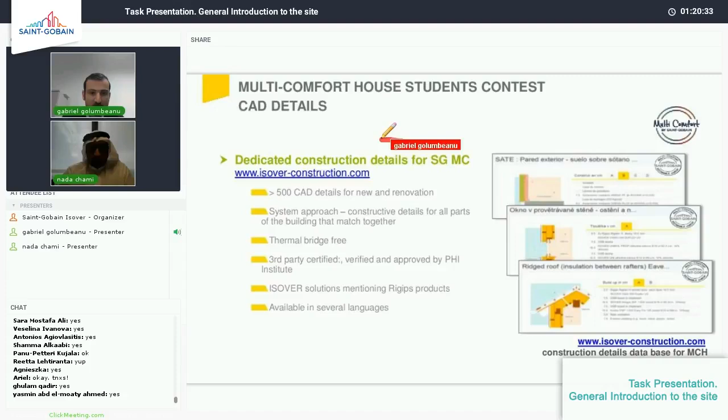And we are going to have also a specific training for the multi-comfort house designer next week. It will take about 1 hour, 1 hour and a half, just to walk you through this information and support you while doing this.

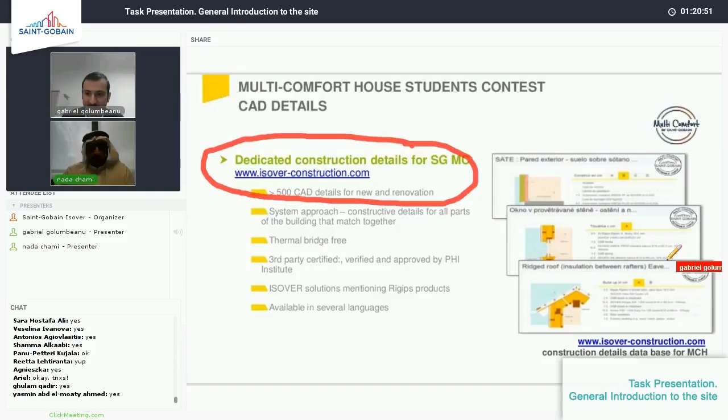So just speaking about the designer, this will give you an idea if you are heading in the main direction. It is not that somebody will look if your result will be, I don't know, 69.9 kilowatt hour per square meter per year for cooling or 71.2. It's just to give you the perspective and an idea, and to help you while you are designing to understand better where the influences are coming from.

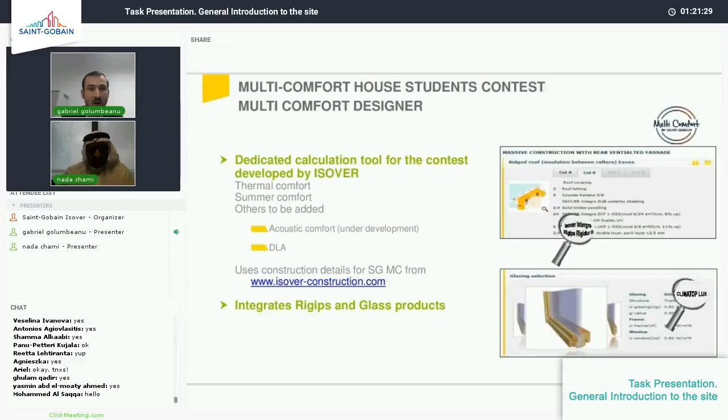Then, there are also trainings for students beside the ones which are done locally. There is this full set of online trainings in which we try to put together all the people that could support you and give you information about the different dimensions of comfort, about the contest task, and about all the other issues that can be linked or related with this.

You have received the training. The connection is very simple: you just type in the address of the website, and once you have it, the connection will be open around 1 hour before we start, so you can very easily log in.

Any specific questions linked to this part? You can still hear me, yes? Yes. So, good. Do you have any questions linked to this? Good.

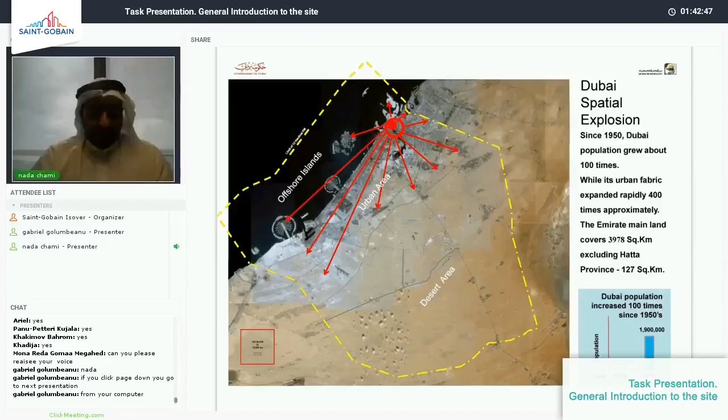and Dubai Airport and many other projects, which are known to be the milestones for the city before it boomed during the era of Sheikh Mohammed. And during that time also, Sheikh Rashid set up all the governmental institutions, including Dubai municipality and other institutions.

Now, from the slide here, you can see the old Dubai, which we saw in the first slide, and its relation to the site. So the creek was extended all the way to where you see your site is, and then at this point here, it stopped, where we have the reservation at the moment.

And then only a few years ago, it was further extended here throughout the Business Bay and Jumeirah. And it was, I mean, when I look at it, it is more like an extension of what happened in the past, an extension of the economy of Dubai through its peak.

There are a few pieces of information that we can mention later. Can we go to the next slide, please? Okay.

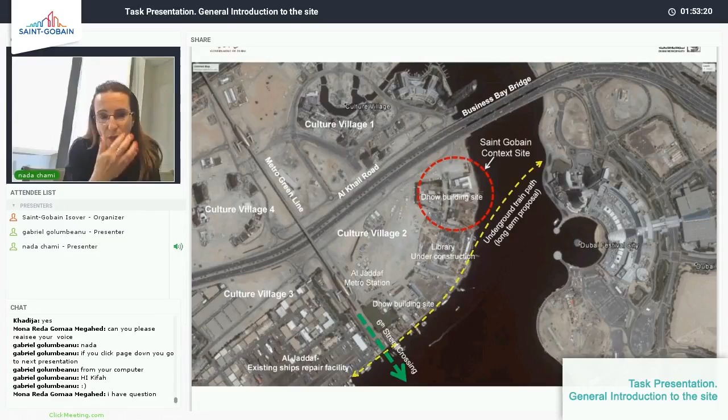The other component we are considering in developing Culture Village 2 is transportation. As Gabriel said in the brief, students need to look into energy saving, so you need to work carefully on the selection of construction materials that you include in your design.

On the other side, looking to the bigger scale of the master plan, we are trying to create on this spine, which has an existing metro station, a transportation hub in which we will have taxis, buses, metros, and there is currently a marine station in which people can use the ferries or small abras to get transportation to this site, the old Dubai, or the new site of Dubai, which takes you to Business Bay.

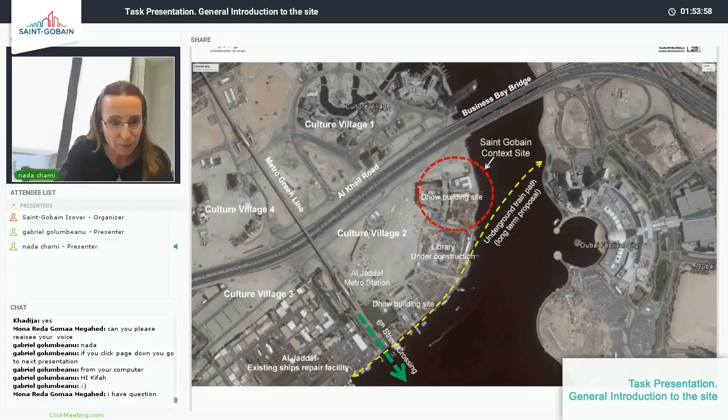Mona has a question. Mona, what is your question? Yeah, go ahead, go ahead. She will ask.

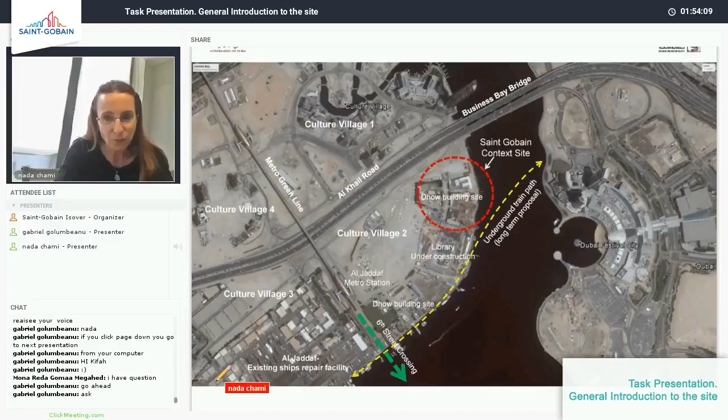I think it's the skin. Okay, yeah, that shows the limitations. That's the boundary.

Are you planning to extend the corniche to the location of the site? Okay, Fatima. So as I mentioned, there will be onshore components and there will be offshore components.

The offshore components, we are planning to extend on the creek front of the development. We are trying to extend this area to do marinas and some floating retails. I lived in Sydney for a while, so I know very well how in Sydney they extend the pontoons to have some retail, some jetties that people can walk inside the water. So as I mentioned, yes, we are planning to extend the corniche inside the water, of course, if we get approvals from the authorities.

But as I said, yes, we want people to interact with the creek. We're not going to block it. And we're working to have Culture Village as a tourist destination as well. I hope I have answered your question, Fatima.

Just to continue on the presentation, as you can see, this is your site of the competition. The area is around 500,000 square meters, if I'm not mistaken.

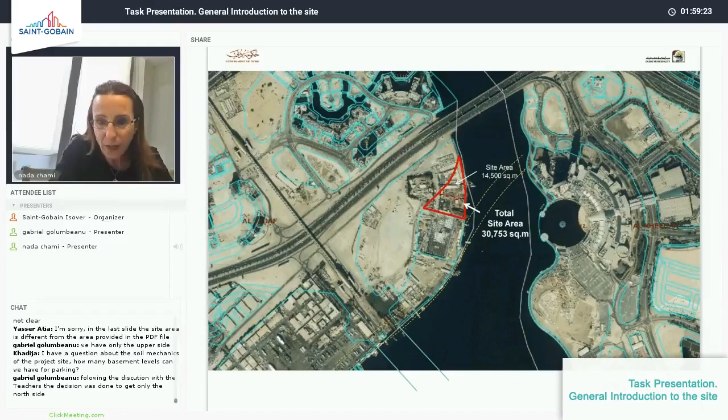So if I go back, this is the existing, as I mentioned, this is the Abra station. These are photos showing how the area will look like, this one from the festival site. This photo is taken from this side, showing the bridge.

So your site will be here. If you can see, these are the dhow boats I told you about, which local people are constructing. Thank you, Gabriel, for the help.

We'll go through, so yeah, this is the site, as you can see. This is Burj Khalifa. I'm sure maybe the photo was taken on a foggy day, but it's visible, especially on clear skies in summer.

And this is the current dhows, and this is the library, which is under construction. You can see the cranes, you can see the building is coming up.

Mona asked about the road: will the Corniche take a part from the site, or will it be from the extended part? We will share with you the site plans, but the Corniche, which we call the promenade or the quay wall, is usually part of the site, the solid land. If we want to extend into the creek, it's going to be a floating structure. So the Corniche or the promenade, yes, it's part of the site.

And of course, we are coordinating with Dubai Municipality Construction team to make sure the library as well, the area surrounding it, is compatible with our design. There will be accessibility from the library to the promenade. I hope I answered your question.

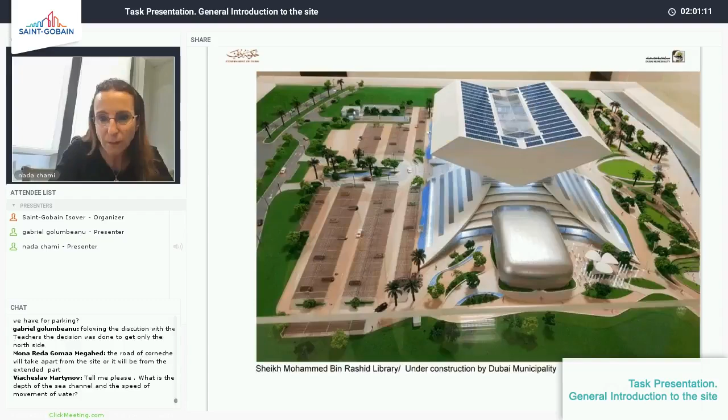This is another view from Festival City. So this is the site, this is the library under construction, this is the metro station, as you can see, and Burj Khalifa.

There will be ferries or abras connecting both sides, so from here to here, there will be abra stations. And as you can see, on the Festival City opposite side, they have the big mall and the hotel as well, so it's another tourist destination that can bring people to your site.

How about setbacks from road, library, and sea line? The codes for this site are not available yet. Dubai Municipality team will provide you with those details. You can also check them on the website of Dubai Municipality.

I will pass again to my colleague Saif, so he can take you through His Highness Sheikh Mohammed Library. So the library is currently under construction. We just have this image at the moment to see the form that will be shaped soon, which will be part of the rest of the development.

But to take you through, we have some other sites that also show some important details that concern you. You can find from the web all the information about the climate. As you know, most of the year it's very hot, but in winter we have very beautiful weather where people spend so much time outdoors.

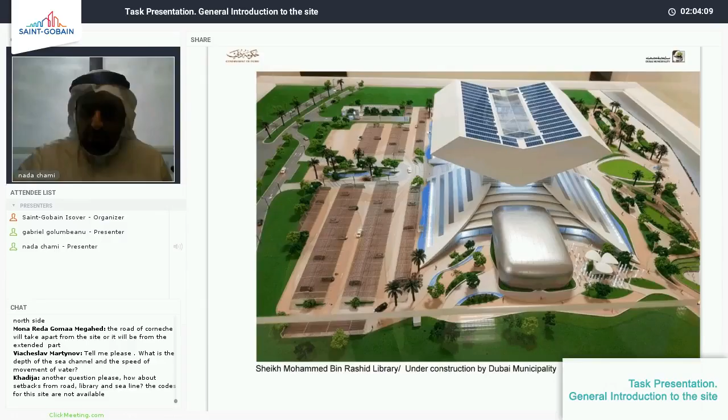You can see the proximity from Dubai Airport. You can see other important sites like the DIFC, the Dubai International Financial Center, and the sanctuary, which is a very important issue in Dubai, not only Dubai, but globally. Environmental issues have to be considered in all design, with the sustainability and all the regulations and rules that were set for you on the website.

I only knew yesterday that we have flamingos migrating to Dubai in this region, so this is also a sanctuary considered an attraction for these birds. I learned that after some research and monitoring their movement, some of them are staying the whole year in Dubai, so they don't travel anymore. They like staying in Dubai, so this is a matter you can also consider.

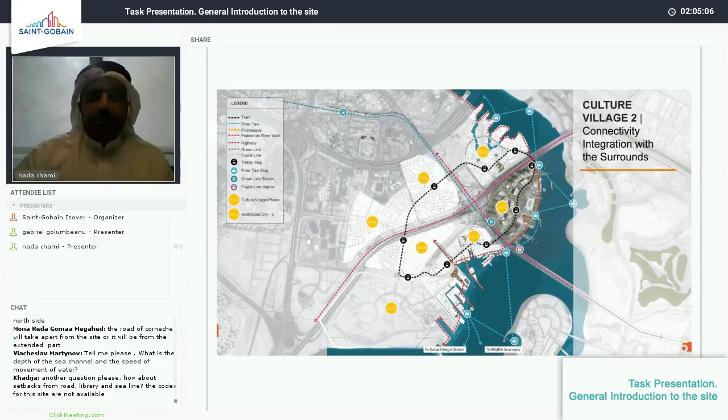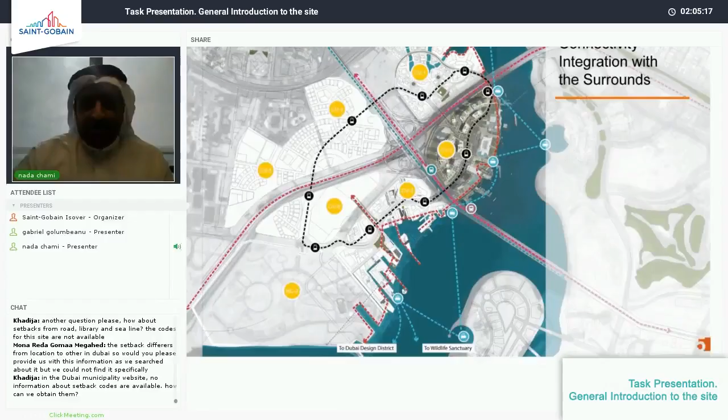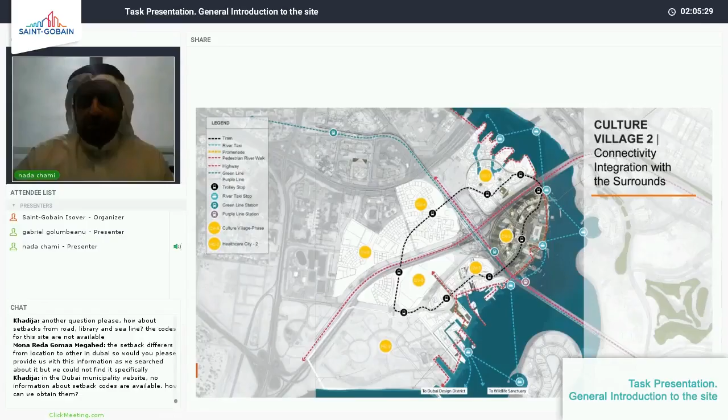This plan shows the road network. It shows also the metro lines that will run beneath the creek, and it shows the tram, shown in black, that runs through the site. So your site, and also the ferries.

Your site is going to be in that corner there. The blue line shows the connection with the ferries, as my colleague Ms. Kifah explained. It will connect to the other side, enhancing the activities happening between both sides.

For the setback codes, we will be sending them. Khadija was asking about this. You can check the Dubai Municipality website, and all the information is available there. But we will also, through Saint-Gobain and the organizer's website, try to provide something very soon.

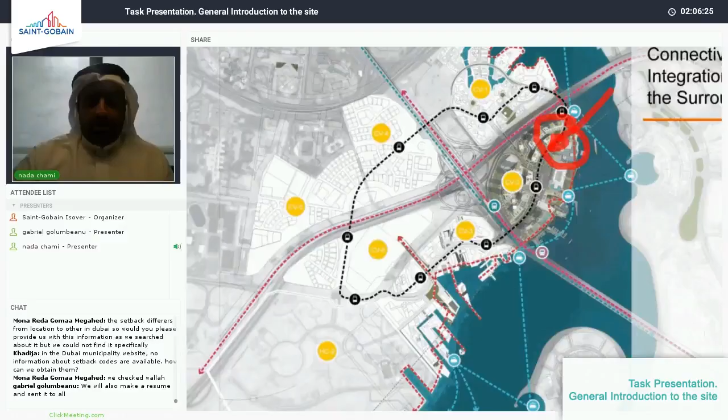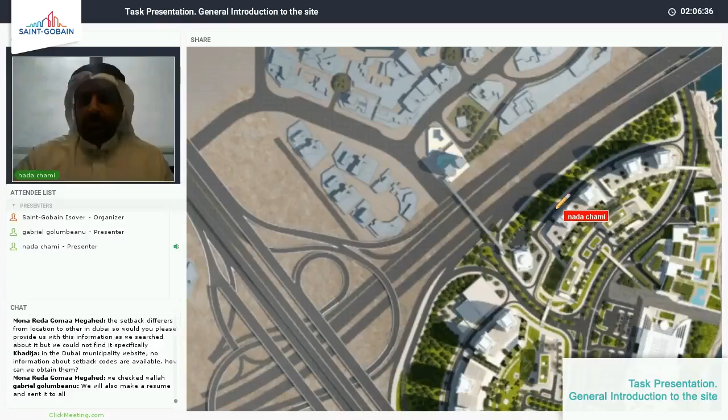This next slide shows the development by Dubai Properties, and your site is going to be in this somehow triangular shape. It's a triangular shaped site.

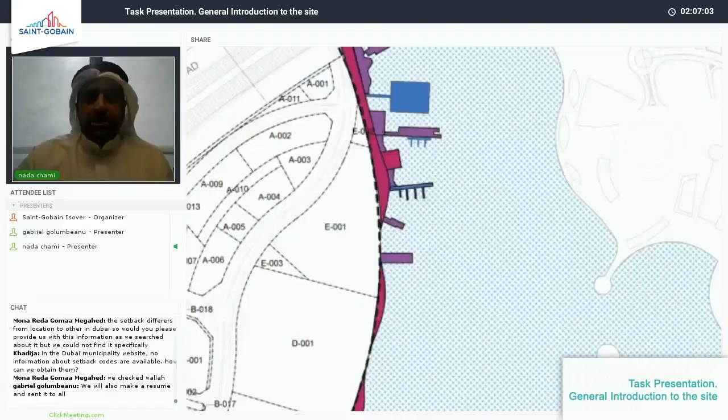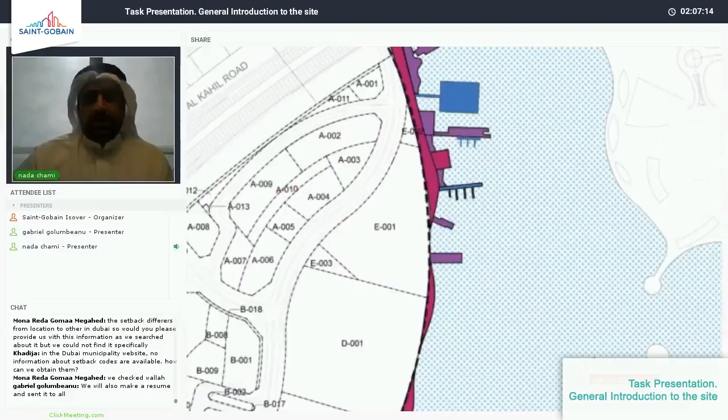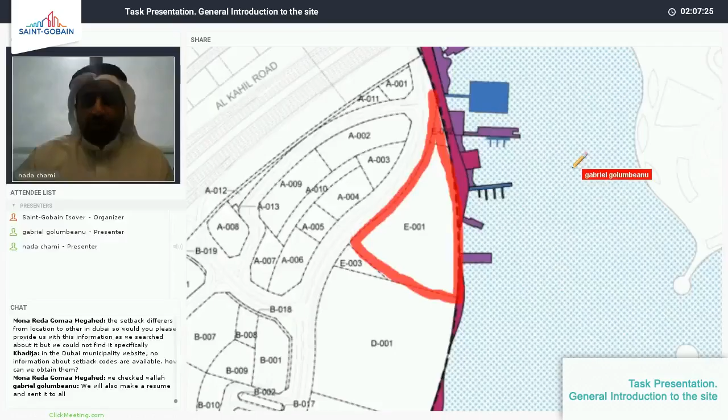So you have a major part of the site on the creek, so there's so much interesting things to do: to have accessibility for the public, to have great views, to have places where people can have quiet and more tranquil spaces in relation to the busy city.

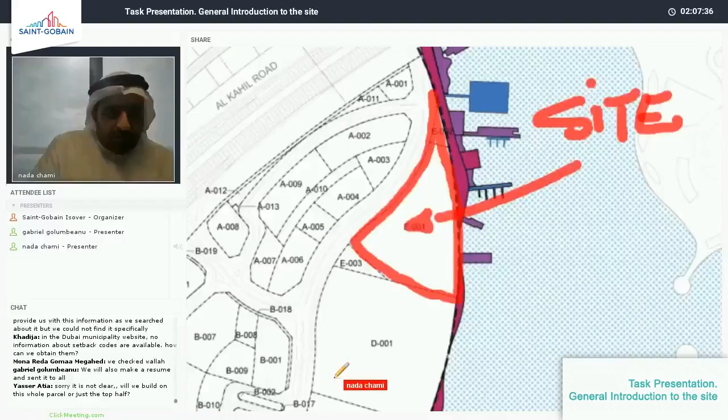Sorry, I'll answer what her name was. She asked about the Corniche. Mona? Yes. How can we go back? Okay, you have the question? Yeah, I remember what she said. Sorry, I'll just explain what Mona was asking about, when some of the students asked about the residential and the Corniche. Sorry, I'm just trying to zoom out. Just make it smaller. Okay, no problem.

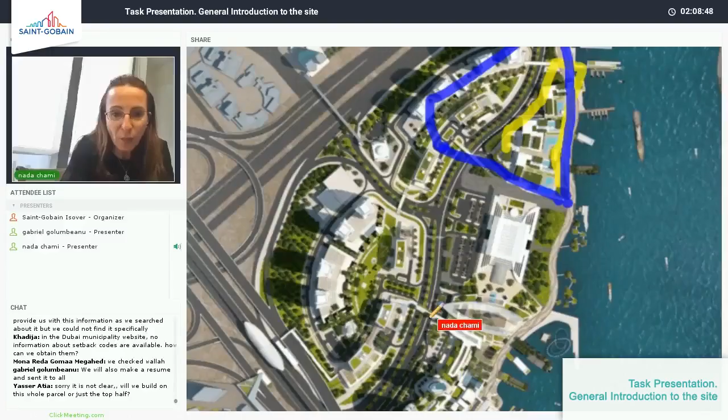As you can see, this is the boundary, the plot boundary, so this will be the Corniche all around. Within the plot boundary, we're going to build the Corniche exactly up to the plot limit. These are the residential towers on top, with their own access road from the back, so privacy is maintained for the residential area. This area will be more of a tourist destination, with hotel, retail, and the library, more publicly open, with their own parking and car access. This area, of course, no vehicles are allowed—it's going to be mainly for pedestrians.

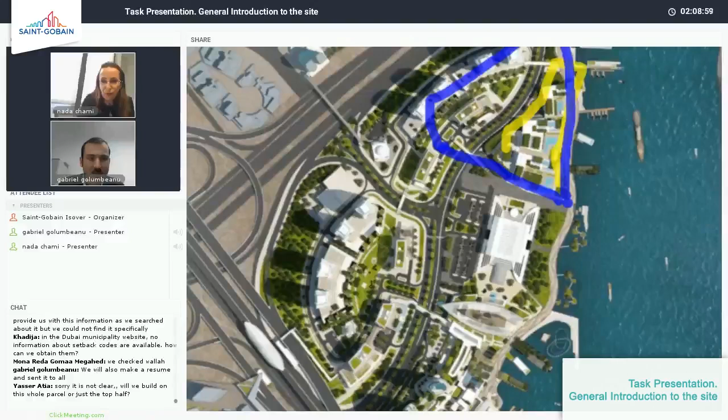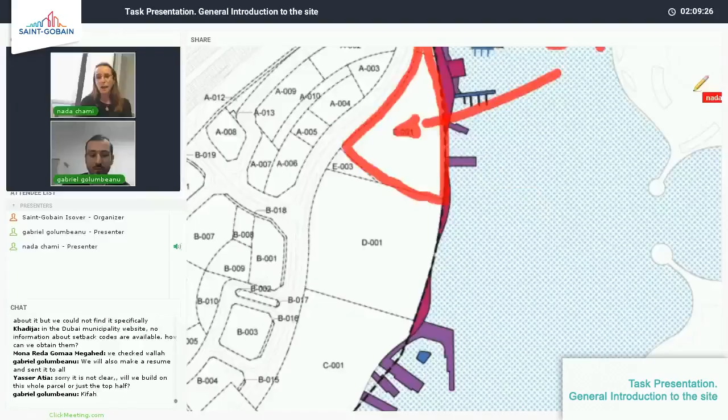Then if we go to this slide, this is where we are planning to extend on the water, which is a floating pontoon, not constructed building. Can you hear me now? So these are, as I mentioned, the offshore components, which will have marinas, some floating retail as a pontoon, but not a constructed building. And this is your site.

Okay, here, Kifah? Just, Nada, can you turn the mic off just 2 seconds to make a comment? Thank you. Can you hear me? Can you hear me? Okay, good. I just want to make one comment because perhaps it's not very clear.

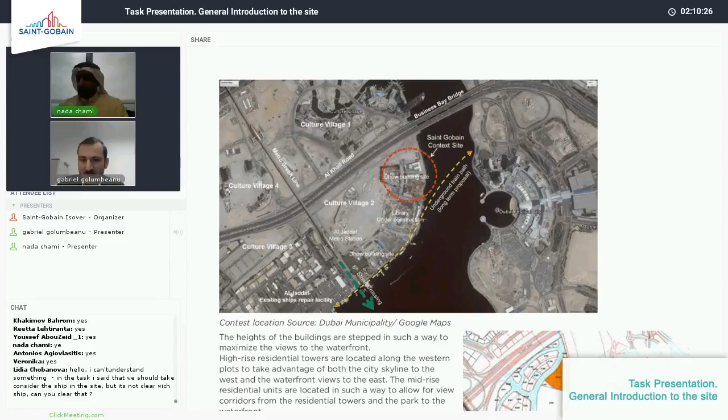If you go to the contest site, to the contest task, and take a look at it, many of these questions have already been answered. I just tried to get it—so you can see here very clearly, this is the site that you are requested to develop. It's very specific and clearly defined in the contest task. It is parcel E001, and we'll go through it during the task presentation, just to make sure everybody understood correctly and saw it clearly. Sorry for that interruption, I'm just passing it back to you, Nada.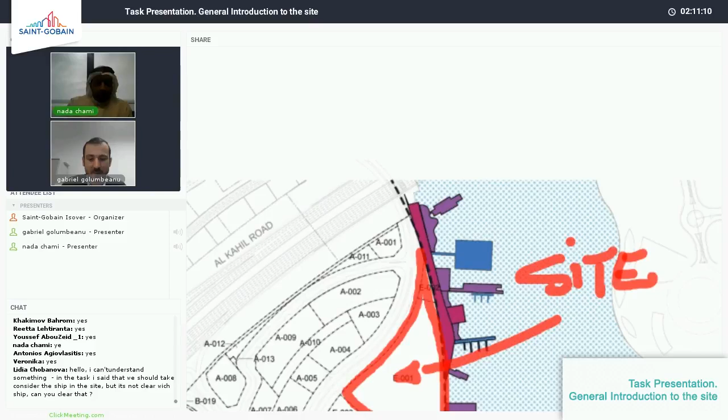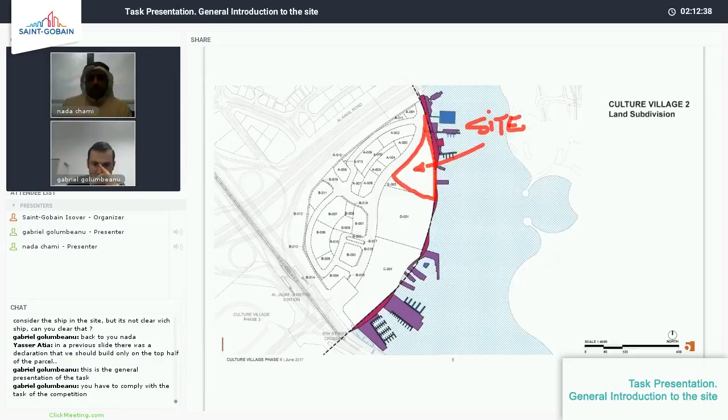It's the dhow issue. As my colleague Mustafa mentioned, the site currently has a dhow construction or ship existing at the moment, and the people there were given new lands to move to Jebel Ali. Here the competition is telling you that you can consider keeping part of the dhow building site, which can in itself become an attraction. But of course, you will have to work around it to maintain and ensure that accessibility is done in a proper way, because you have heavy logs being brought to the site, or heavy industrial movement happening in relation to the site and the development around. So it's more of a logistic planning, but using what's happening there as inspiration partially for your design would be interesting to see how you consider it.

So this is the pedestrian paths that were shown, and that will be part of the development that will happen later on.

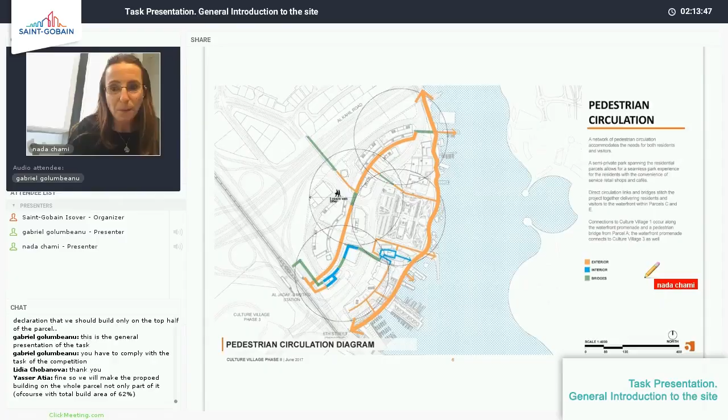I just want to explain the pedestrian path. As you can see, it's connecting pedestrians from the transportation hub I told you about, at the Abra station, then the metro. We want to make sure pedestrians have a consistent pathway. Considering the summer weather of Dubai, we are looking to provide natural shading and rest areas to encourage people using the pathways. So I want you to study the climate and temperature in summer, and what solutions can be brought within your designs to ensure pedestrians still use those walkways.

Yes, I have a question. Yasser, yes. Building on the whole parcel, not only part of it? Of course, with total built area 62%. Yes, yes, Yasser, that's the understanding, yes.

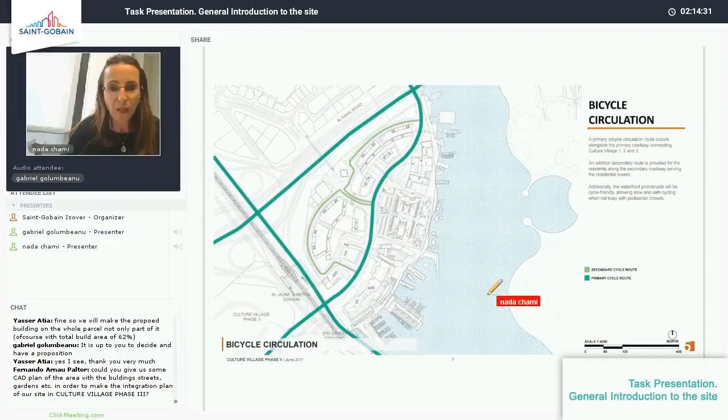I'm sure you have all of this information provided to you. So all the slides you are looking at are part of our master plan of the overall Culture Village, which we want to include as well bicycle circulation, and this does not interact with the vehicle circulation.

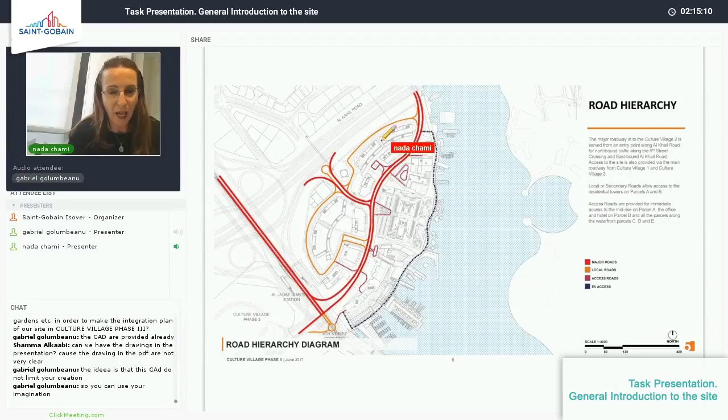This is the dhows, as you can see, after they are built. Thank you, do you have any questions? I'll pass to Sue. Do you have any more questions?

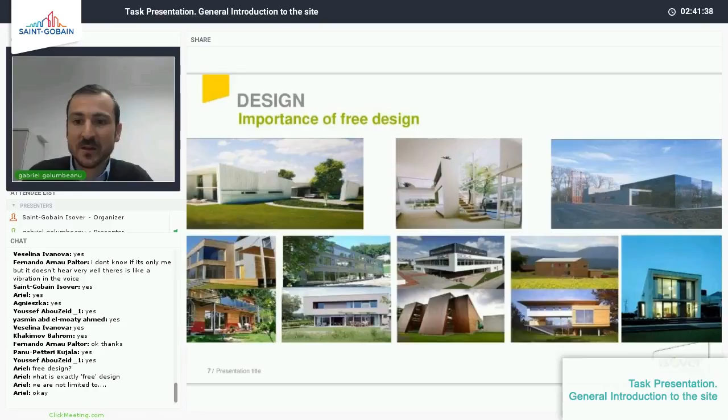Now, this being said, let's go further to speak about comfort. Looking at it from the thermal point of view, of course, we will not have this issue of it being minus 50 or minus 35 outside and needing to do something about it. But we'll have, however, this problem. And in the thermal comfort presentation tomorrow, we will discuss a bit more about how to obtain, and what kind of architectural gestures or decisions can help you improve some of these and achieve this thermal comfort.

Now, why do we speak about it? Because besides the clear link with energy consumption and sustainability, there is also an effect of thermal comfort, for example, over work performance. So if you design an office in which you have too high or too low temperature, there is a direct connection between the relative performance in percentage and the temperature.

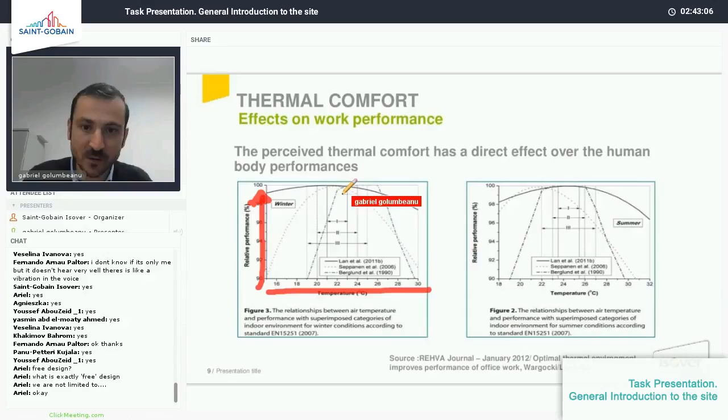So you can see it here, how the curve is going. If you are going to have an office that's too warm, you already decrease the performance of the human body by several percent. And this means a huge amount of lost money, because while operating offices, the biggest amount of cost is not linked to running the building itself, but it's the cost of the people working there.

And of course you can always say, doesn't matter, we'll put in some active cooling. Yes, you can put some active cooling in case your building is not behaving thermally correct. Then you put in some active cooling, and then you generate some other issues.

Either you make cold hotspots, or you make people living in certain areas unhappy because it's too cold inside from the ventilation, or you generate issues because you've designed a building where the ventilation system comes in and creates too much noise. Noise which, as you'll see, affects human performance a lot.

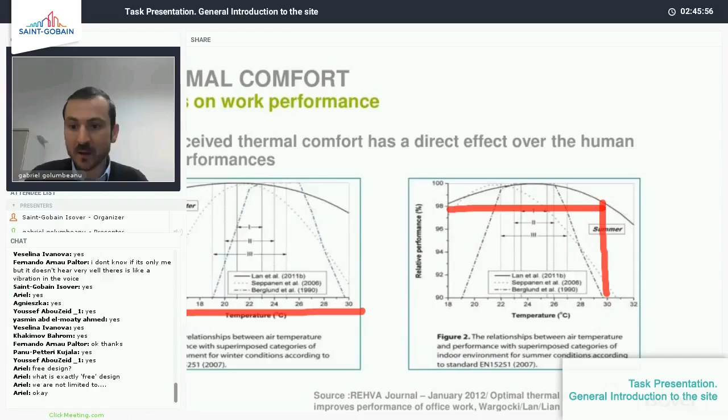So the things are connected. When you look at one dimension, you have to look also at the others because they are interconnected, and one affects the other. Now I will go to the next one, speaking about comfort, just to give you an example, and we'll go deeper into details.

Everybody knows to some extent that noise is not good. There is a direct effect of noise on human health. For example, if you cannot sleep because of noisy neighbors—and this happens in a lot of buildings—there is research showing that sleep duration and the incidence of coronary artery calcification are closely connected. There are many other tests showing the effect of noise on the human body, even affecting the fetus during pregnancy.

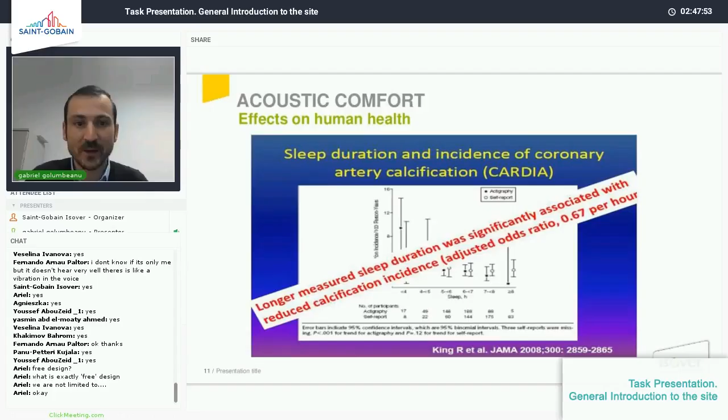Recent studies show a connection between the weight of the baby at delivery and the amount of noise to which the mother was exposed during pregnancy. If there's too much noise, the baby's weight decreases by different amounts according to the level of noise exposure. So if you're designing a residential space and the mother cannot sleep, that will even affect the baby. We're going to go slightly deeper into this—here's just an idea of the consequences.

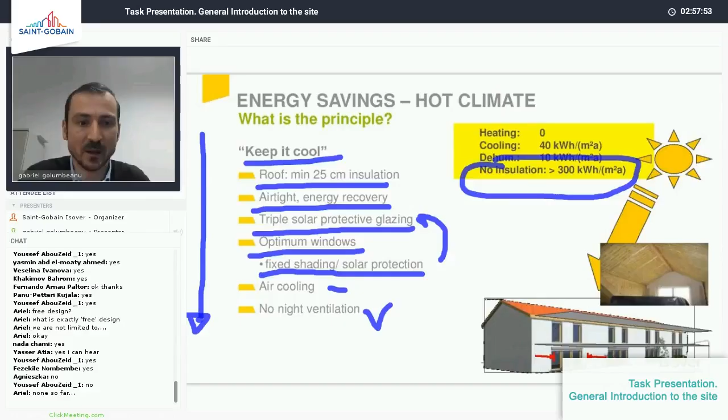You have air cooling, and of course you are not going to go, in our case in Dubai, for night ventilation, because if you open the windows at night, it is guaranteed that the temperature outside is higher than inside, so you don't win anything. Then you can adjust this and come to the optimum. But we will go a little bit more in detail tomorrow about the thermal.

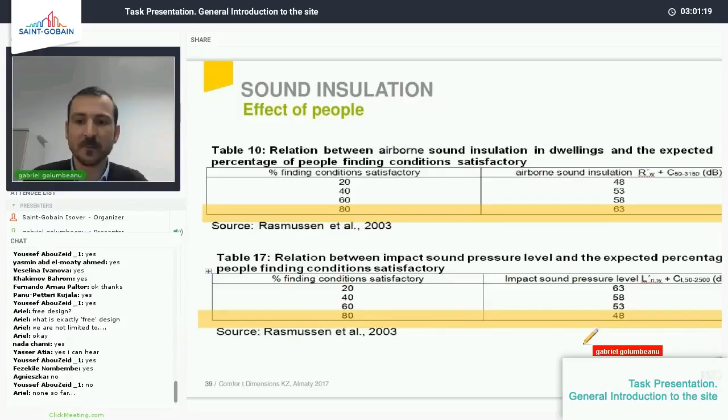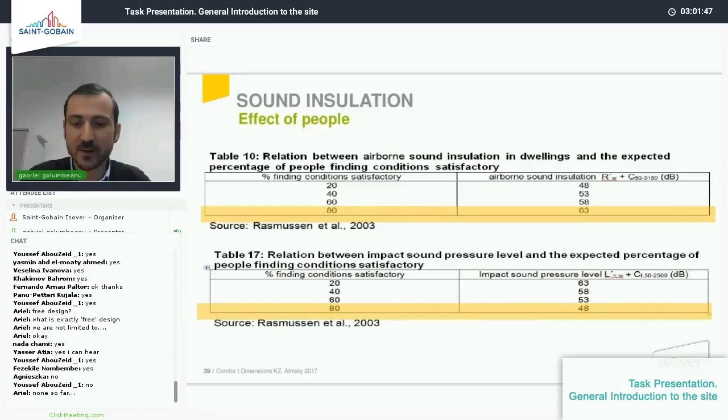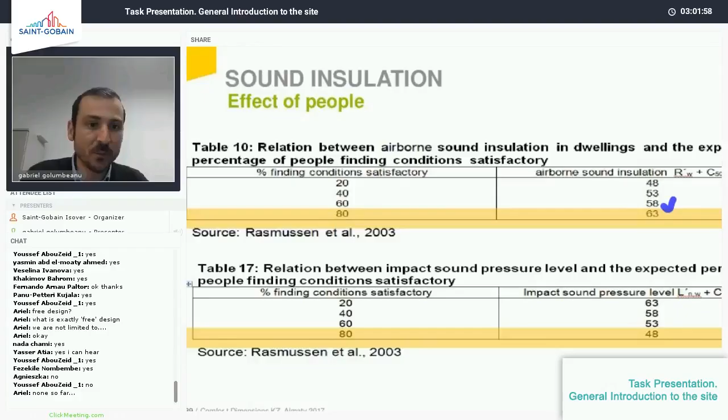This is a very interesting graph showing the relation between acoustic comfort and the degree of satisfaction of the people who will live in the buildings you are going to design. If you look at this, you can understand quickly that if I use a level of airborne sound insulation of 58, then perhaps 60% of the people living in the building will say it is satisfying from an acoustic point of view, that they are not annoyed by the neighbors or by noise from outside. But 58 is already a lot.

Okay, can you still hear me? Yes. Okay, I've lost the camera for the moment.

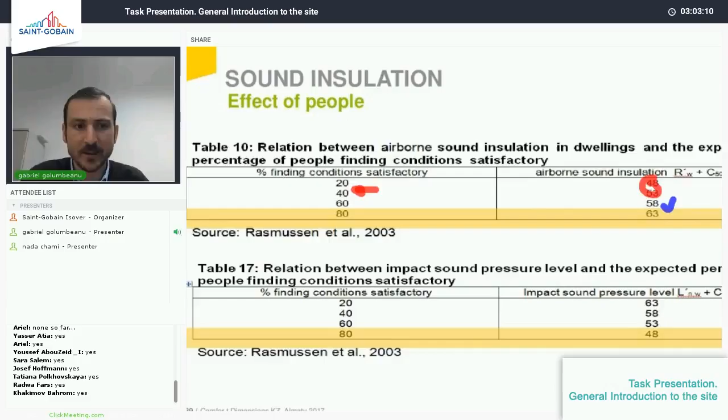58 is a very good level. Most of the time we will be situated here, and that's why in most cities, people living in multifamily houses will find the conditions related to acoustics unsatisfactory. This being said, I hope I've been able to give you a brief idea about MultiComfort as such. We'll continue tomorrow with thermal comfort, followed in the coming days by acoustics and daylight.